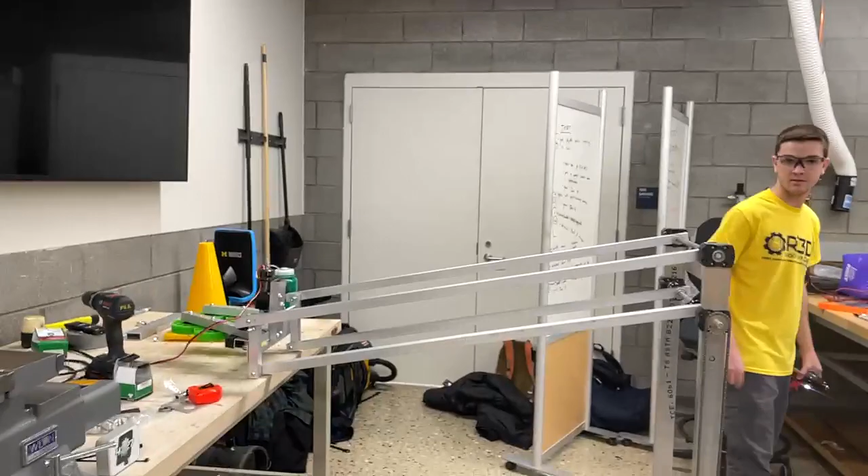Very exciting. Dom, do you want to talk? Talk to the stream, Dom. Sure, I'll talk a little bit. How do you feel, Dominic? I'm a little tired, but the coffee's getting me going. I was going to say, tired? That sounds like a coffee problem.

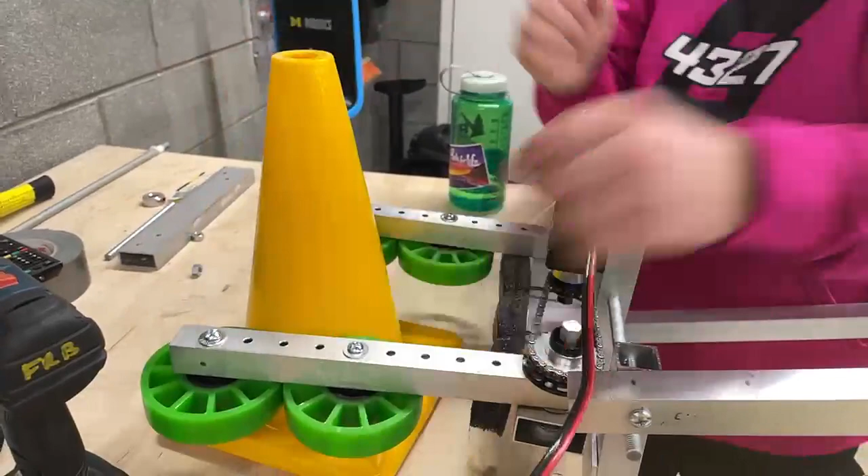Well, yeah, it is. Here, wait, let me come around the other side. A coffee vision problem, if you will. If you'll zoom in on our intake - so this is our intake system, run with this R775 Pro. We've got a 10-to-1 gear reduction on here just because that's what we had on hand. When you run this, it moves this one and pinches the cone, so it would look a little bit like a pinching angle. And then these wheels are free to rotate like this...

Well, actually, they're not. Oh, if you look... oh my bad, that was not attached yet. If you look under here, John, there's still zip ties that constrain the wheels, so they can move a little bit, but they're not free to rotate. Okay, so just a tiny bit of motion under there.

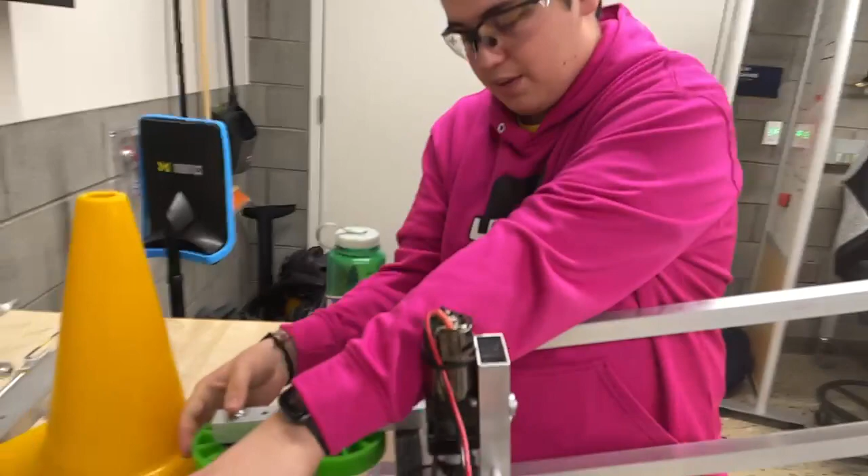We originally had them free to rotate, but the problem was when we tried to grab the cube, which is much wider than the cone, it would just shoot out. So we wanted to avoid that. We can do a strategy recap in a little bit - right now we're just going to talk about the robot, Colin.

Also, Emma says hello - that's my sister. Emma says hello, hello. All right, and then it's mounted to this big old 4-bar linkage, as I think we discussed probably yesterday, and the whole thing...

Oh, uh-oh, I'm moving, we are moving now. We lost the piece that wasn't attached - that's fine, we don't need that, it's useless. So the whole thing moves down.

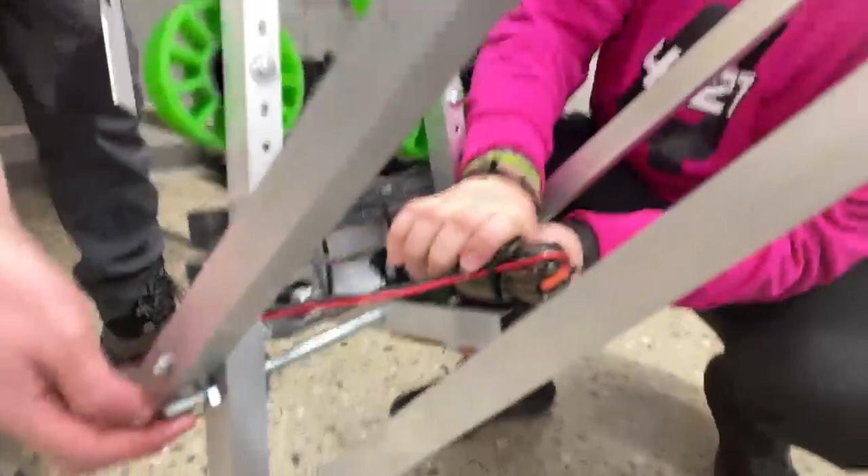Ideally - don't tell the stream that, you can't give them all the secrets on day 2 - ideally it would go all the way in, but currently we're running into an issue where the screw that we're pivoting about for this to fold up and let us be in frame perimeter is interfering with the bolt. So we're gonna cut that off and just have nuts on the inside. We have some other strategies if that doesn't fix our problem.

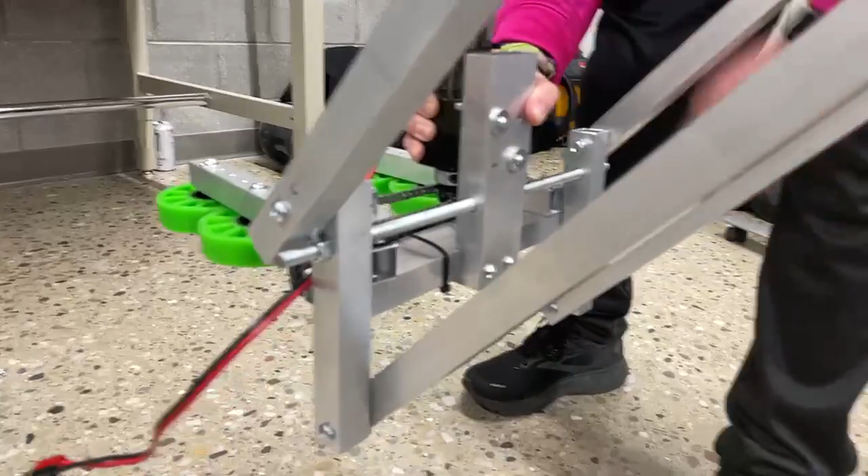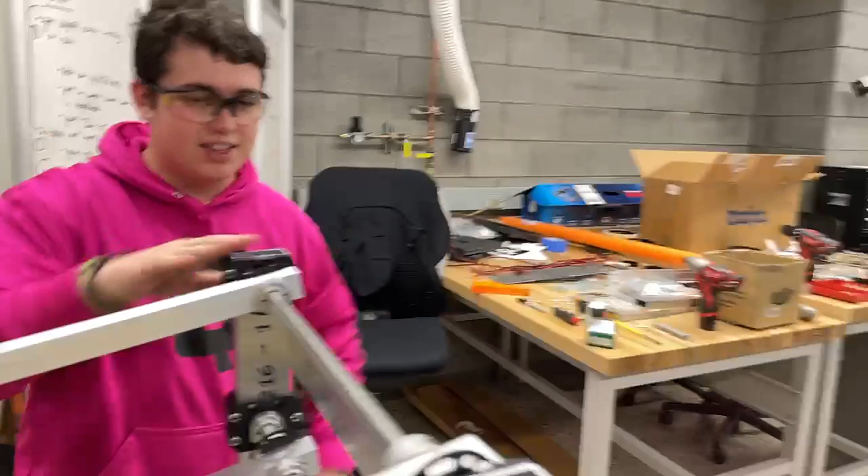Almost tall enough to ride the rides at a theme park. That's true, dangerously close - put some bottle caps in the shoes and you're ready to go. My parents did that. Really? Anyone else ever have to do that? Bottle caps underneath your heels, and you're just slightly tall enough to get into that roller coaster. Just wear new shoes with like thick heels - that works too.

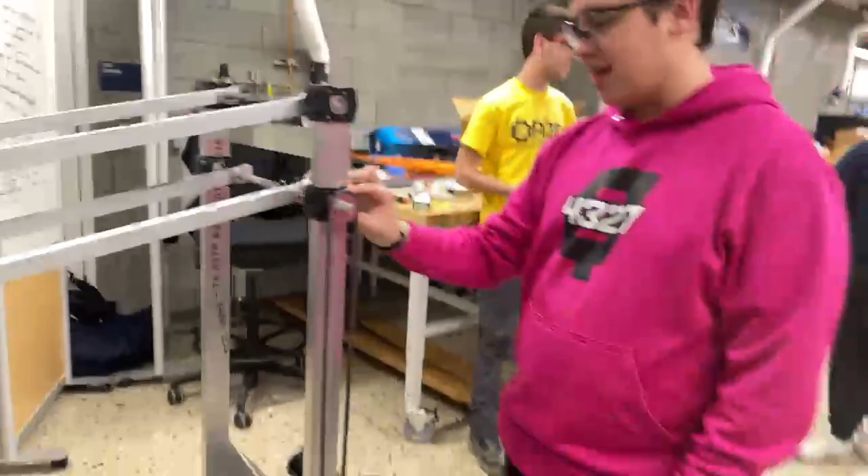That worked for me. So the linkage is all driven by this joint right here. We've got the sprocket running down to this sprocket, and then this goes on the motor.

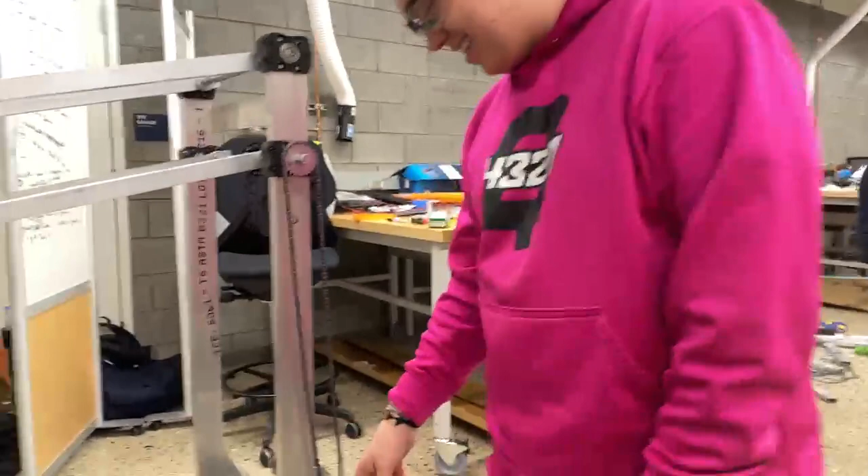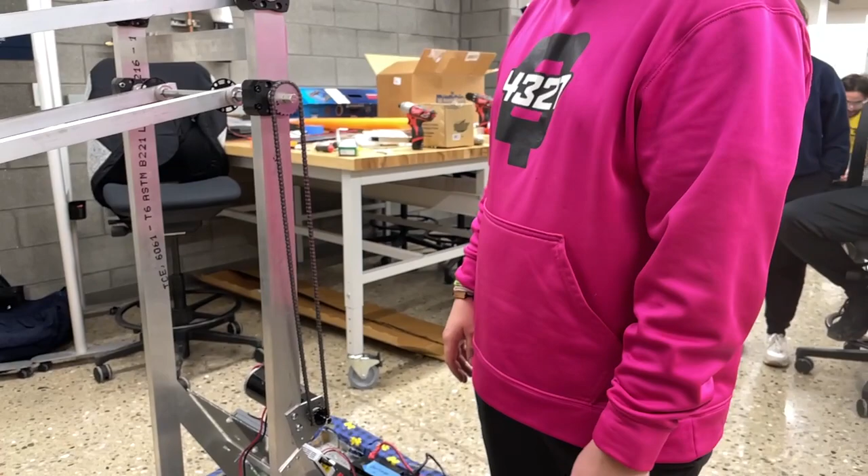This motor is a CIM with a 70-to-1 VersaPlanetary on it. That's the same gear ratio we used last year for the climber. Suspicious, almost like it was repurposed. And then this sprocket makes the entire system a 105-to-1 gear reduction. It's unclear if that's going to be super slow or if that's going to be not enough power or not enough torque. Once we've solved our issues down there, we're gonna test it and see what's up.

I want to let everyone know, unrelated, but there was a comment about someone doing toilet paper in their son's shoes, so I'm not the weird one. Someone else has done it too. It wasn't comfortable, but I wanted to ride that roller coaster. Toilet paper would have been more comfortable, but I didn't have toilet paper in the car. We had bottle caps from our water bottles. Go to the bathroom before you go on the ride.

Alright, moving on. Other developments that have happened today: the battery is now mounted.

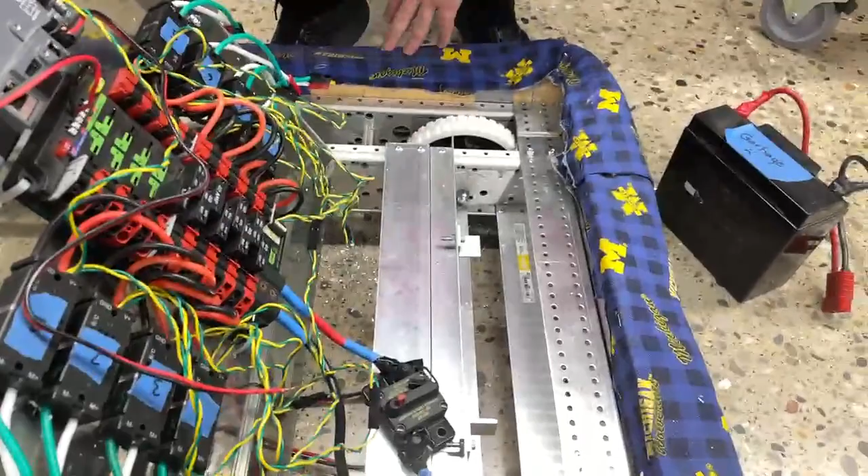We've got this piece of flat stock, this piece of angle stock. We didn't cut our chassis apart this year, unlike last year, which was only because it was already done on the chassis we were using. We decided not to replicate that so we could make use of those holes in future years if we need to. And then when you slide the battery in like that, it's not going anywhere.

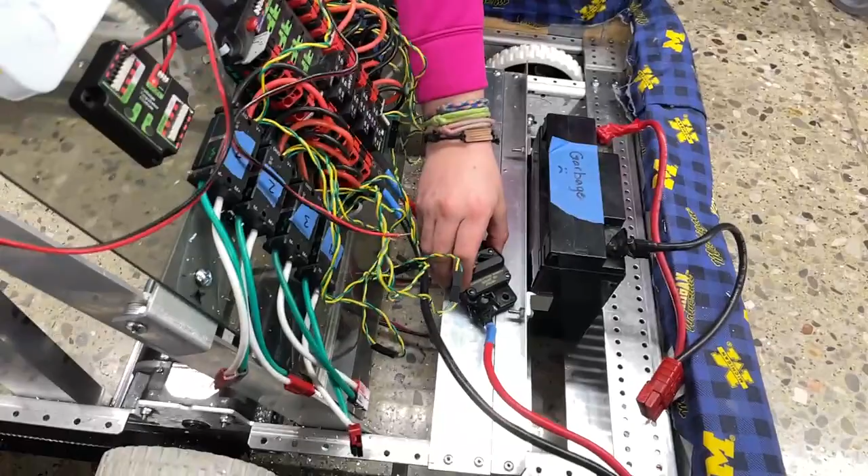We've got this piece of flat stock here where the breaker is going to mount. We haven't quite done that part yet. That's okay, and then that leads to the rest of our electrical system, which has been lovely mounted - this is the electrical board we were talking about earlier that nearly caused some issues.

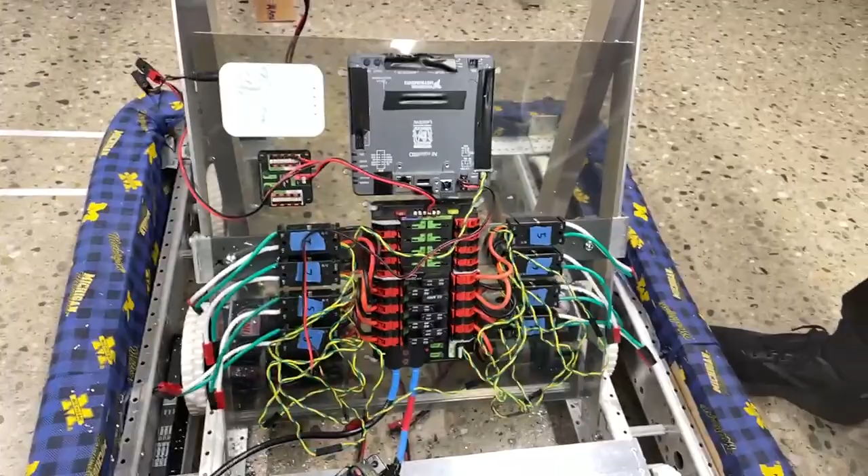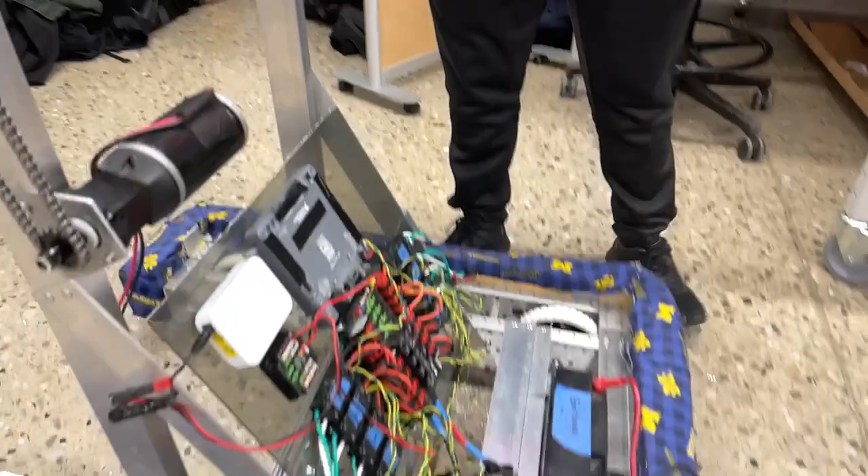Nearly caused issues? You didn't know about that? Not everyone was aware of that story. The incident - yeah, trying to laser cut it, that was an incident. Okay, so you are aware now. Good, very good. We didn't make cyanide - it's always good not to make cyanide.

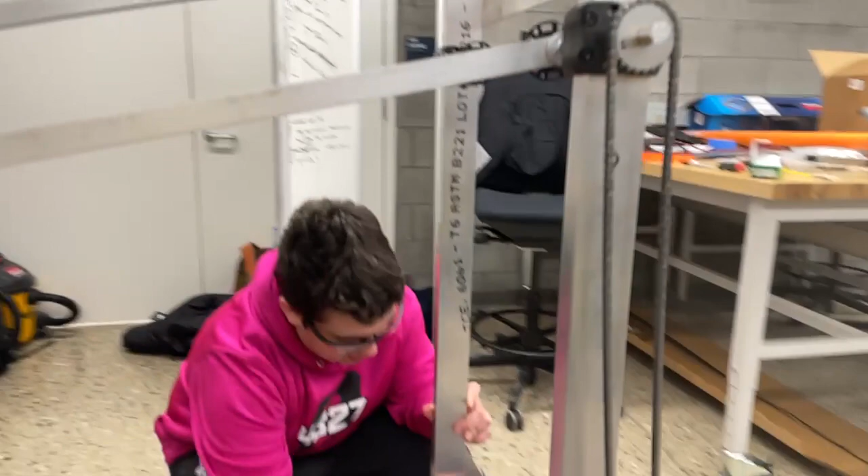Very exciting, hello Raina. So this is simply mounted by these like angled pieces that provide some more support for this. And then we just bent a piece of the same stock to bolt this to, and we're planning on adding some sort of angle iron here just to stabilize it a little bit.

Important question, it's John - two questions actually. First of all, where does the Gorilla Tape come in? Later, that'll probably be unforeseen, but it will appear, I'm sure. We'll have the Gorilla Tape. I'm sure that technology will be implemented.

More importantly, of course, where do the LEDs go? I happen to know we have them. We do have the LEDs.

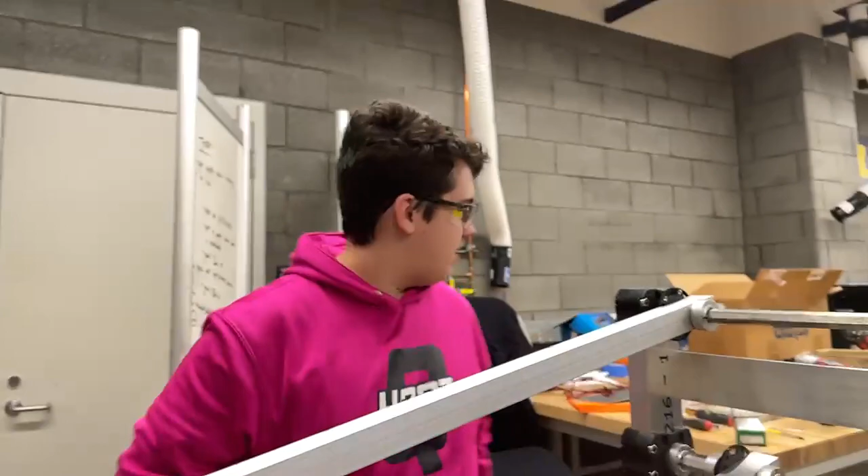Where are they going, Dom? No, those are the old ones that are plugged in - don't show them that one, those don't work anymore. They still work, they're lighting up, that means they work. That's more than zero, that's extra horsepower. Someone unplug that one. Someone give me the power supply for that one, we want to see the LED.

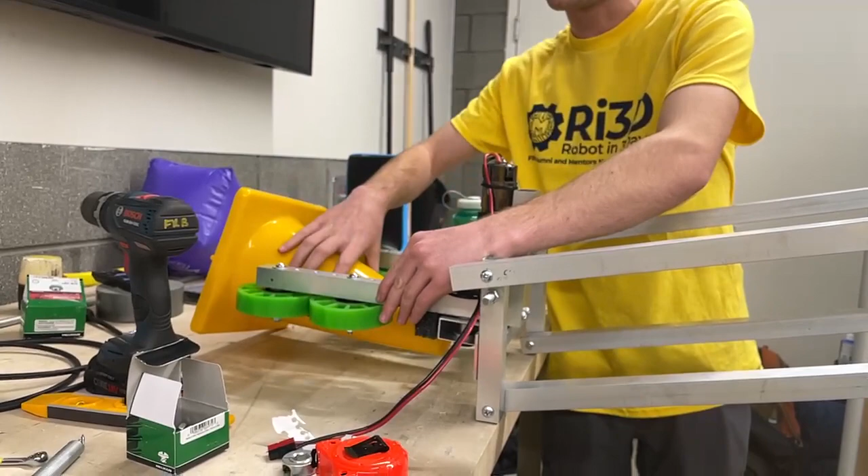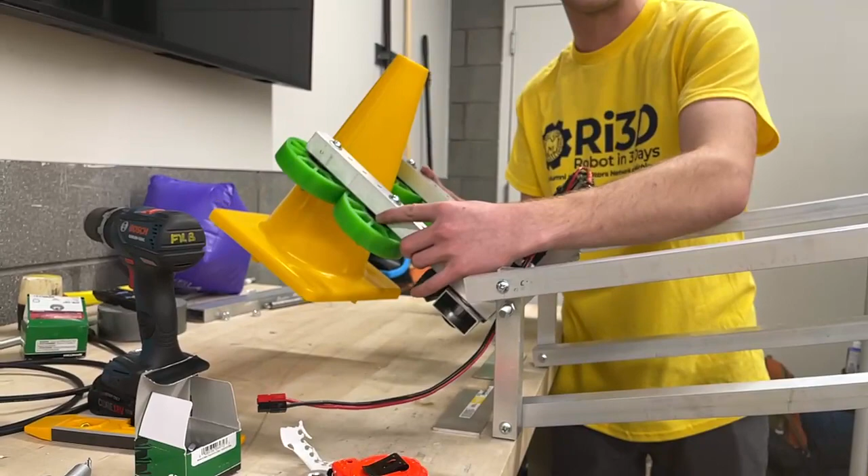Will the intake be able to pick up cones on their side? In theory, yes. We haven't gotten there in practice yet, let alone competition. It was designed so that part moves, and you can pinch and it'll hold on the far two wheels. We constrained the two wheels from moving too much so it won't shoot out. The nice thing we found out is that it's a feature, not a bug: when we lift up the wrist mechanism, the cone will rotate down so we can put it on the pegs. It won't work if it's backwards though. Yesterday we were looking at some kind of rotating mechanism to rotate them before we pick them up.

Where are we with that? Are we still on the same page, or have we gotten some new ideas? I'm not sure we've prototyped that yet. We were just thinking like a stick on a servo.

That's fairly advanced, a stick on a servo. Could that become passive now? It's become just a stick that falls. That sounds even better, we're going to remove complexity. Everyone loves that, nobody wants to deal with PWM servos.

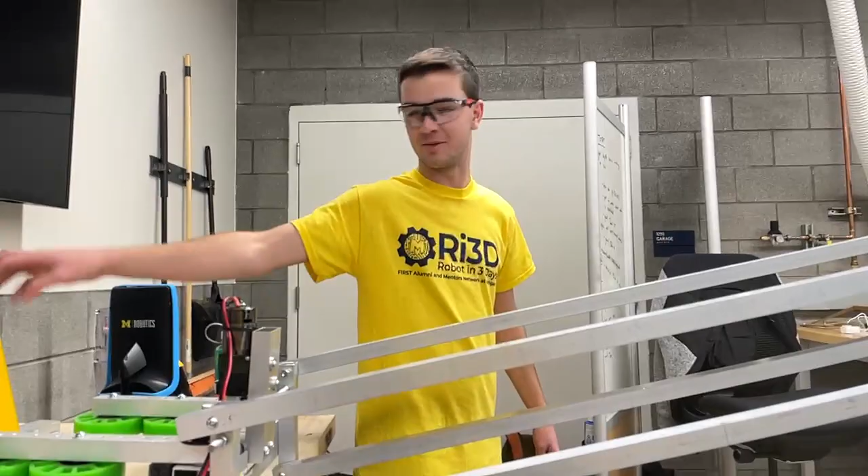Wonderful, wonderful. What haven't we covered yet? Have I missed anyone that really needs to talk to the stream right now? By the way Sophia, someone did say hello to you. I don't know who Thanos Priest is, but they said hi.

Oh, we did code things. Hi, Nathan. Okay, I don't think they... Hi, Nathan, very good, very good.

Okay, I have no voice right now. It's okay, it's okay.

What do we have going on with the drivetrain? This is a standard AndyMark kit of parts drivetrain. This is the long chassis, one of the longest chassis of AndyMark's entire existence, I think - don't fact check me on that. But this is the long chassis, standard AndyMark kit of parts, the same one you can buy and pick up at kickoff. I think we gave away probably 50 of them at kickoff. I don't remember the exact number. We had a lot of kit of parts this year.

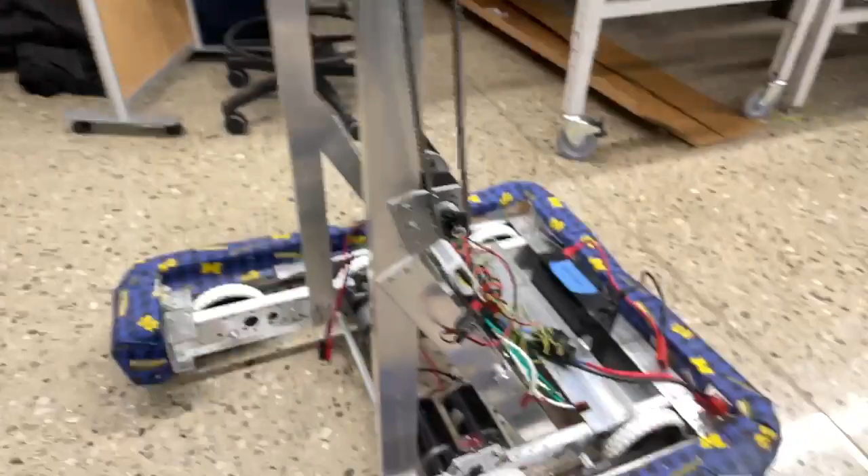We'll do a full recap. Oh my God, there are 30 people watching the stream right now. This is insane guys, it's a new high score. Wow, thank you so much everybody. We'll do a more in-depth recap on exactly what's happened at the end of the stream.

We have another person saying hi to Raina, by the way. Hi guys, I think the whole stream is just for you, Raina. I agree, pretty sure you're the only one they care about. Except, actually, Sophia had someone say hi too.

I did notice that Connor's dad didn't say hi to Connor this time, which, wow, that's rough. He was laughing out loud, remember? That happened because Connor almost set the building on fire. No, I didn't, it wasn't actually a fire. Yeah, but it was close. You were getting close. I mean, that's good, that's good. There was no sign, no fire. Stop hating on Connor, I 100% aided him with that. That's true.

All right, I think we're probably going to take ourselves back up to the room, and then we'll probably do a little bit of a recap. We'll talk about strategy. Who wants to go and talk about strategy with me?

Coding things? We talked a little bit about coding upstairs, let's talk some more. We started yesterday but we've continued a lot on it, and we've got a good idea of how it should work. Our drivetrain should be working - we haven't tested it on the robot, just in the simulator. The arm we haven't tested either, but that should be a little bit more complex. If you're looking for examples on how to use feed forward or PID, hopefully this should be an easy introduction to that. We're trying to get vision working. We have a camera that really isn't suited for vision because it's got autofocus and you need a fixed focal length for that, but we'll try our best to get it working.

Woohoo! Ask Raina if she got my Takis. Raina, did you get Takis? Yes, I already know who that is, and I did get Takis. You did get Takis? I did. Fantastic, we love that. All right, let's go team, keep up the good work everybody.

We had a comment that says Krishna is so cool.

Hold on, a little bit of a hold up. Piro's coming? Fantastic, the stream loves Piro. He wouldn't leave without me. That's fine, I wouldn't want to leave without Piro either.

Piro, you haven't seen the corner office we have upstairs. Have you not seen upstairs yet? That office is incredible, I almost died when I first saw it. No, we don't need the elevator, we have the fancy stairs.

We just had a question from Jackie's Giant about Sophia missing Jackie's Giant. I am unfortunately not in the room with Sophia anymore. If I remember to ask her, then I will.

I think we missed the question earlier about if we customize our drivetrain. We did, I answered a little bit about it. The drivetrain is just a standard kit of parts from AndyMark, the long chassis, with a little cutting. Pretty much just out of the box, long chassis configuration, 32 inches long, 28 inches wide. We cut the front off.

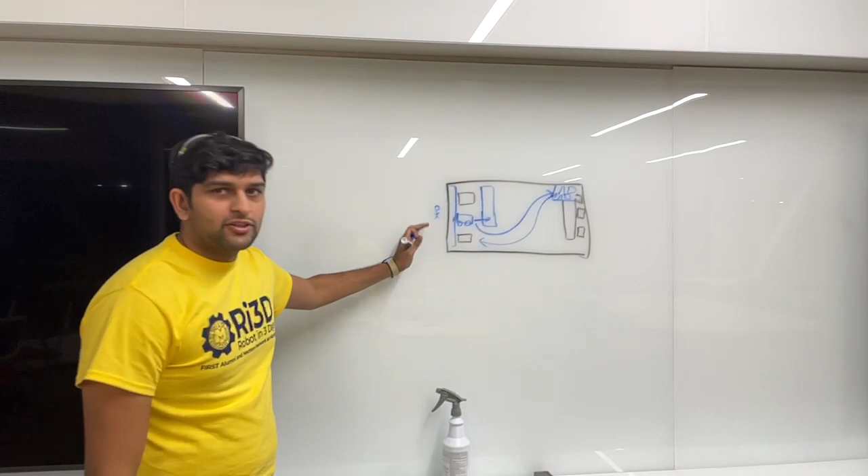And you know where that's going? Where's it going to go, Krishna? On the furthest peg, on the third tier, because our robot can reach that. Wow, with its four-arm technology. Over 3 foot past the robot arm.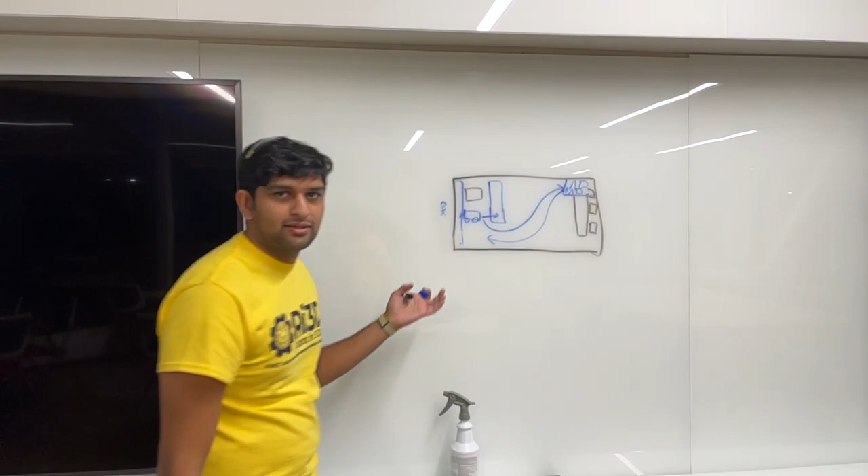Okay, that's insane, I'd like to point that out. How is that even possible? Well, we'll just remove this brick because it's getting in the way. Okay, so we push it out of the way in the game. It's like push the stuck cinder block over here, get that out of there.

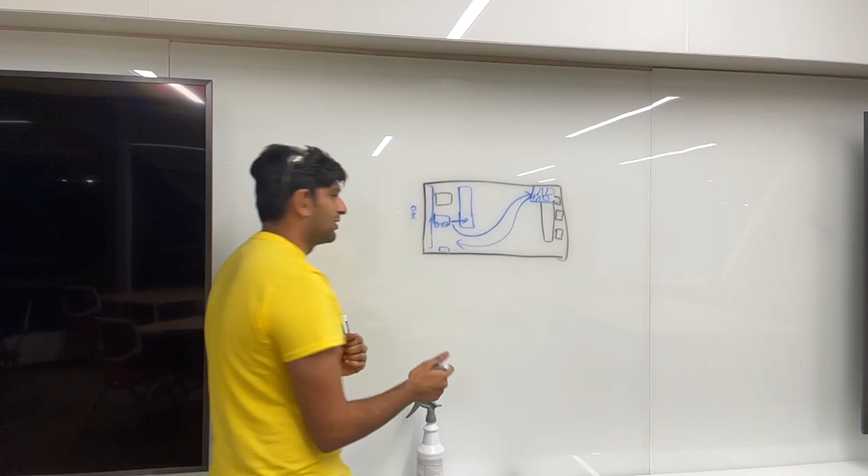It's stuck over here. So now, not only have we scored 11 points during Auton, we've now scored an additional cone on the furthest peg. Now do you know how many points that's worth? That's worth 5 points, Krishna. So what does that get us to? A total of 16 points.

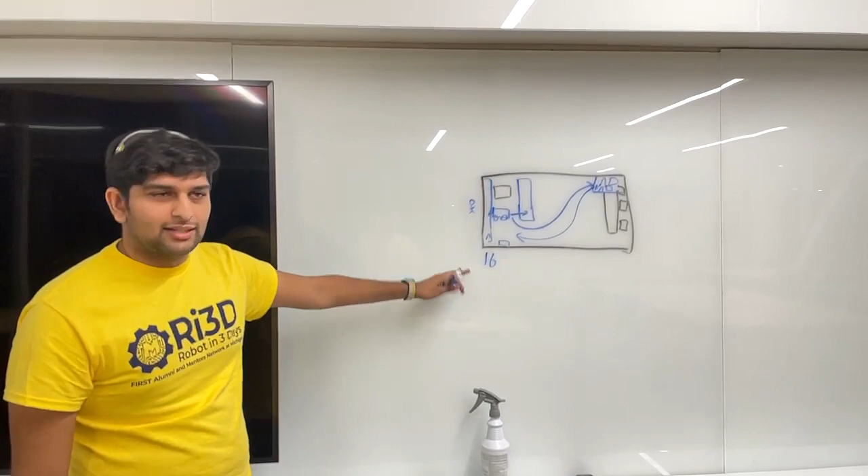Wowee, right? That's not all, because you can also bring a cube over and score it right next to that. So we're going to make two whole trips. What do we have, 2 minutes and 15 seconds? Now what are we at here? That puts you at a grand total of additional 26 points.

Exactly, so we add those, you got 26 points. Plus another 5 because there's a link.

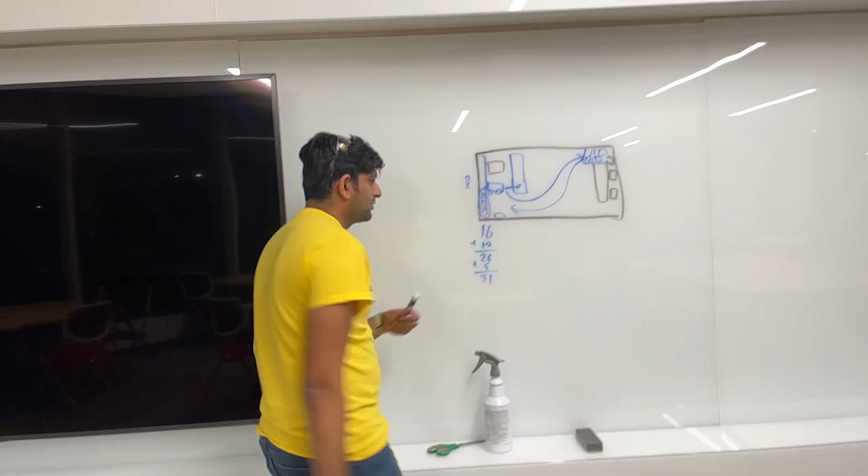We just had a comment from Piro, plus 5 for getting a link. Oh my goodness, how could we forget, look at this, the link points? 3 objects on the furthest peg plus 5, that's a lot of points. Now 20 points right there.

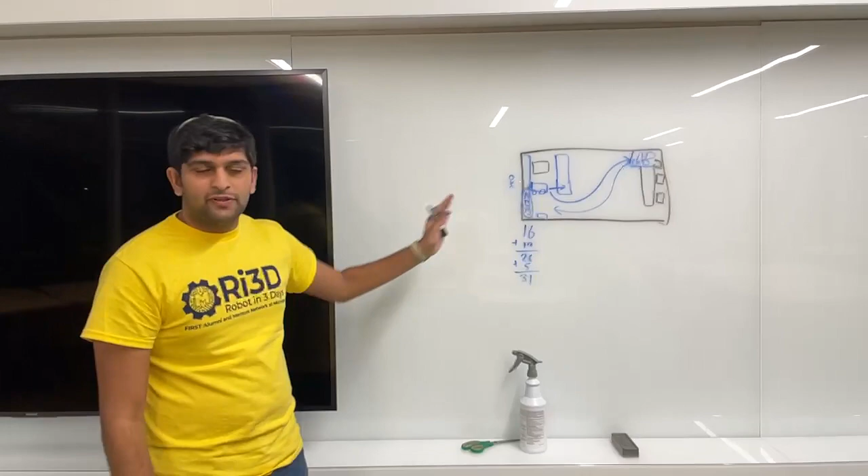Now this was just in the first 15 seconds of teleop. Oh wow, we're going to do this. We've got a 5-second cycle time. Plenty of time, okay? Krishna, you don't seem particularly convinced about that 5-second cycle time. I just can't help but notice - that's also including managing time to push the cinder block out of the way.

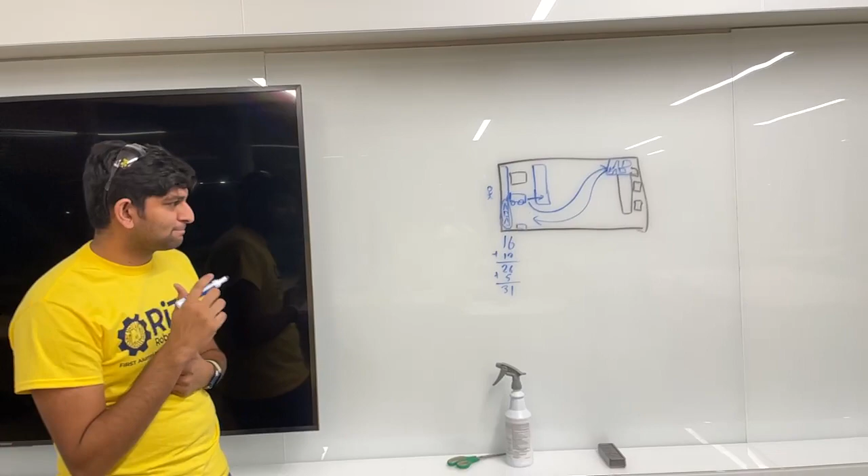It only decreases as you go on. Okay, so you get faster as you go, Krishna. Okay, we have one link.

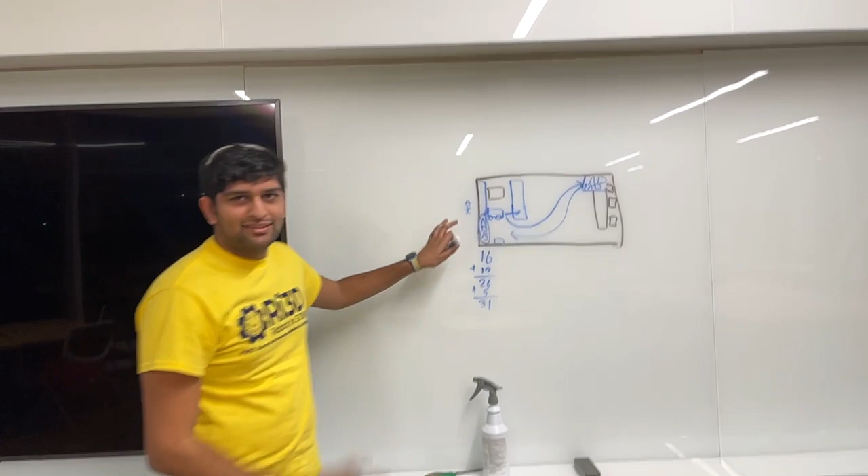As fun as this is, I feel like we might want to take a slightly more serious tone. Okay, so I feel like the idea that we don't have teammates is a good way to think about this.

At the beginning of the game though, at least for our competition, because we will only be competing against RI3D robots, which historically speaking don't tend to perform particularly well. This is true, but it's important to know - sometimes we're the cinder block, it happens, you know.

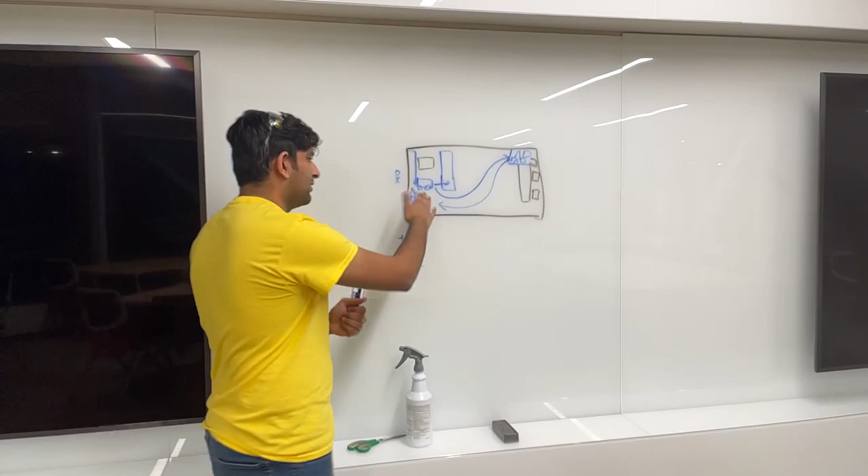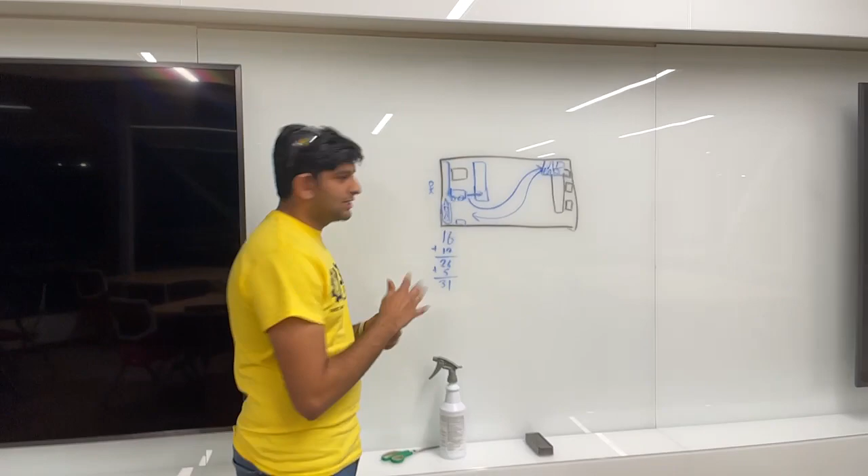It's important to know what your robot can do, right? Like if you build a robot that can only move cones, then you got to realize that you're only going to be able to score 3 links, on the bottom level. So there's these limitations you gotta pay attention to, and you can't get the cooperation bonus if... well, I guess you three could all get in the bottom.

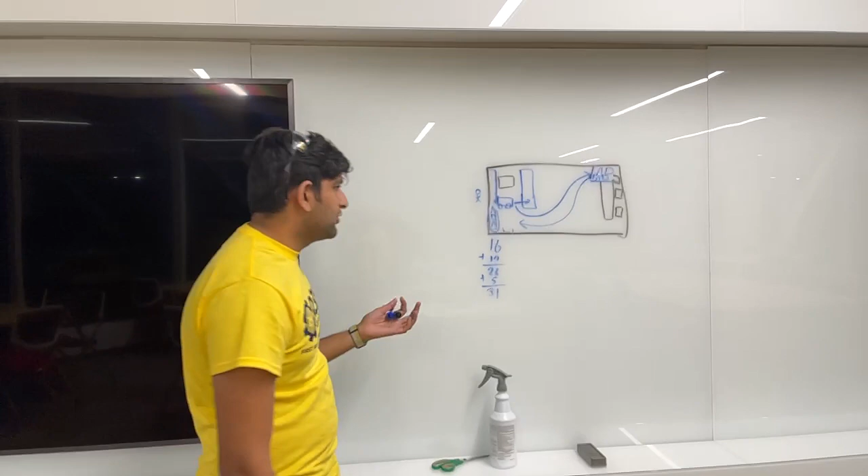Cooperation, a little bit difficult. But now let's say your teammates happen to be really good at scoring cones - what should you focus on? Should you focus on bringing cones from the opposing side over to you, or should you focus on bringing cubes, or bubes, and scoring them?

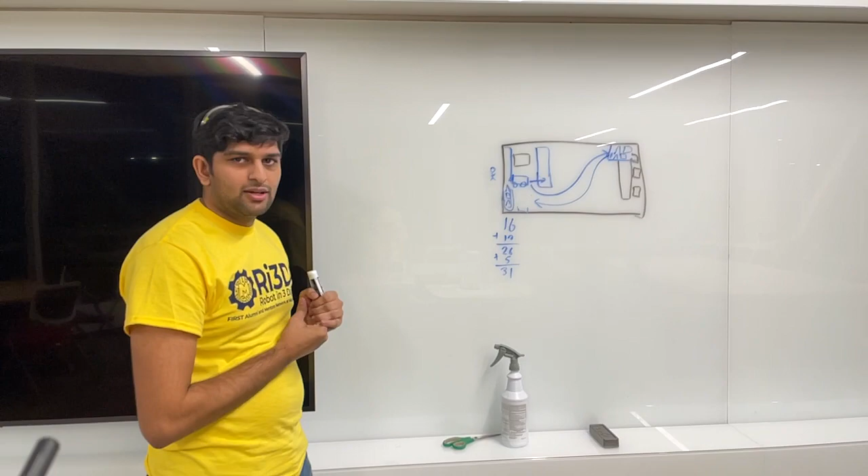So I think our focus was we want to be able to do both. We want to have a pretty fast cycle time, which is why we chose a speed-oriented approach. We put extra work into the code for drivers, making sure they can switch between whichever drive - arcade or tank - whichever they're more comfortable with.

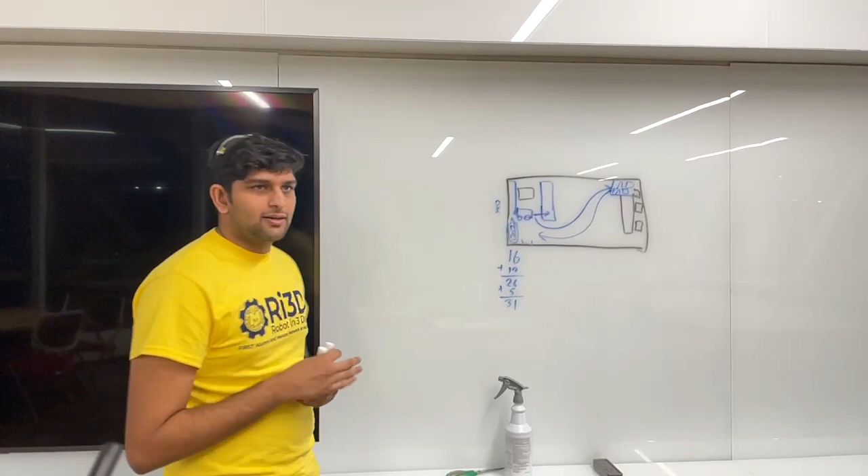Different speeds - we've got many different things in the code, which you can check out on our GitHub. But mainly, we want to be able to have a fast cycle time while also scoring both cubes and cones.

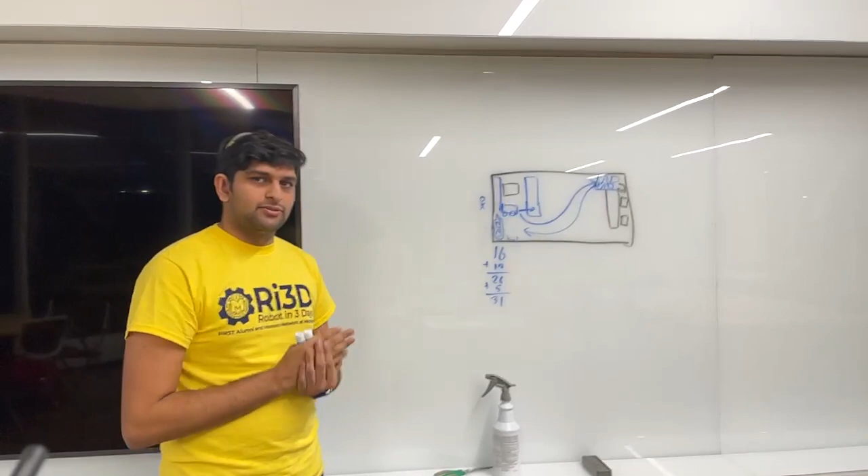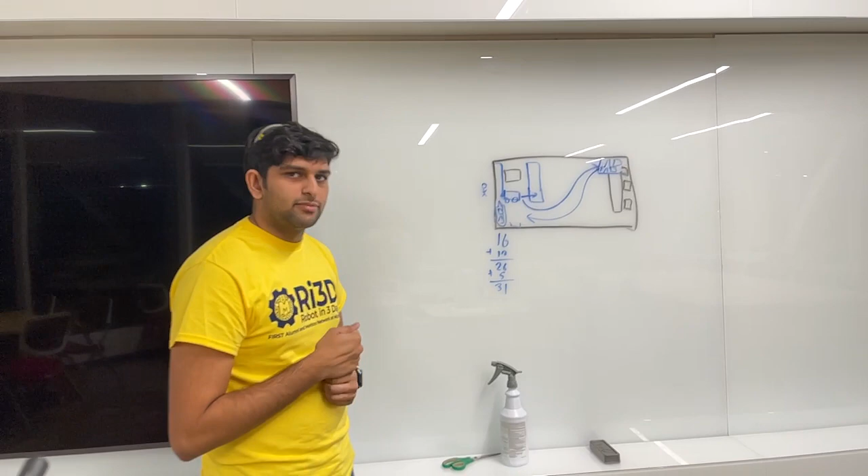Our goal is 16 points during auto, pretty doable. We want at least 3 game pieces during teleop, preferably on the furthest location. We did build the robot specifically to reach back there, and you get way more points for being back there - it's 67% more than the middle row. That's a lot of percent, you know?

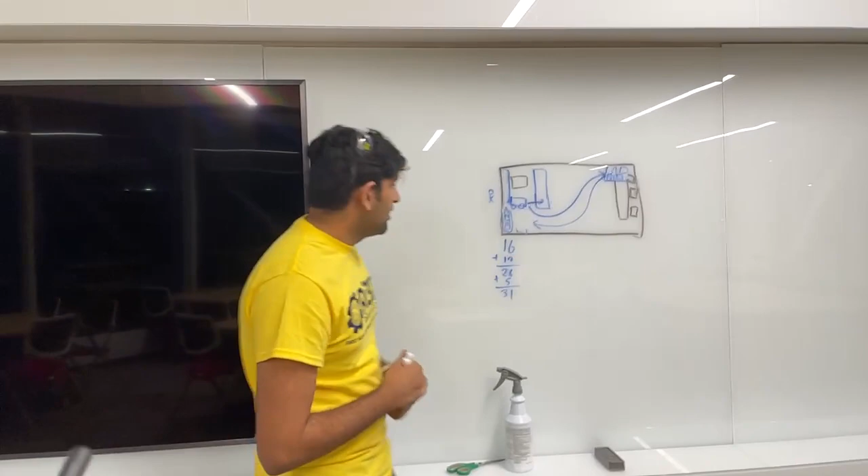And you can score in the center to get that cooperation bonus - might as well get a few ranking points there. And with teammates, you're only going to increase the score, because if you can already do this much, there's no stopping us.

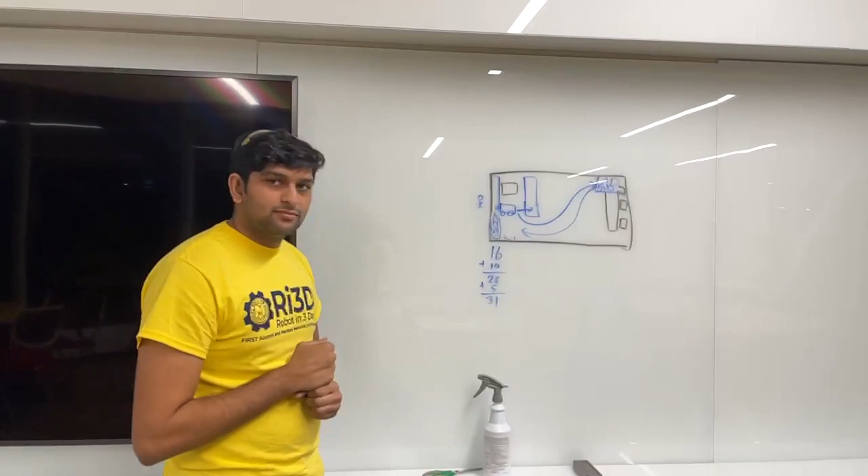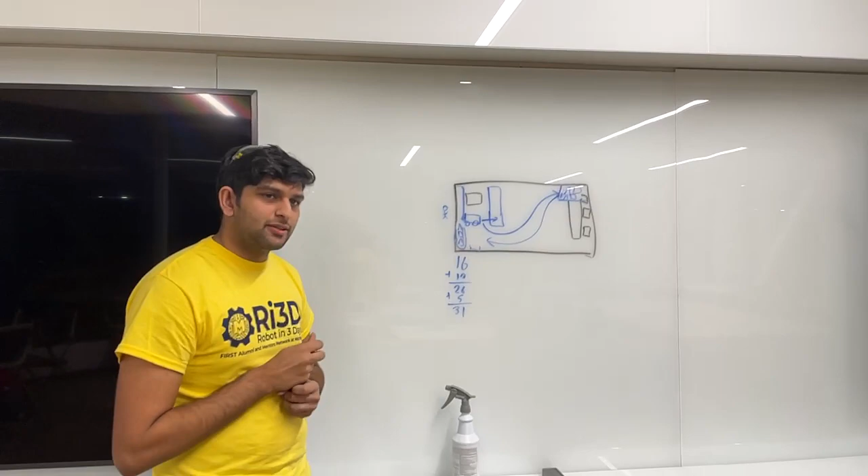We also wanted to talk about our thought process on balancing the charging station. How are we thinking about balancing on there? I think that's more of a mechanical question - if you want to ask Piro. Piro, let's talk about the charging station.

Come on up, Piro. Let's get you in front of the whiteboard. Let's see it - there he is. There's our guy. That's him.

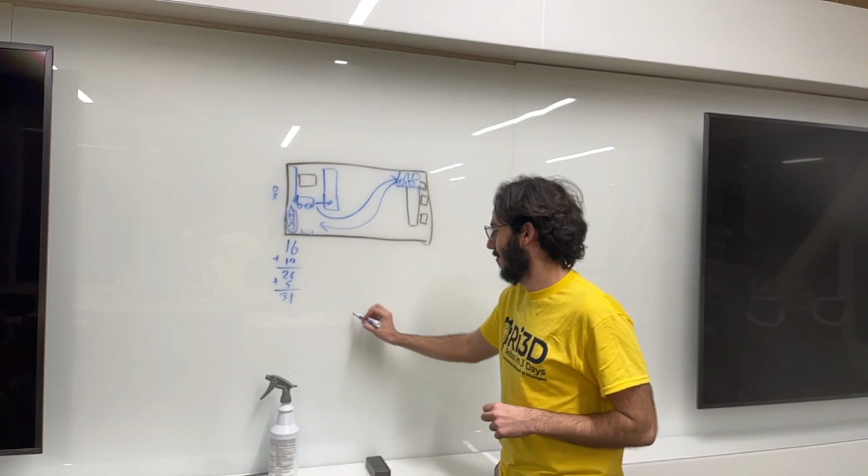The charging station, for those of you who don't know, has a little platform with 2 little ramps and a section in the center. This center section balances on a box that exists underneath there, so when you put weight on one side, the whole thing ends up tilting up on that box, creating a pretty steep angle.

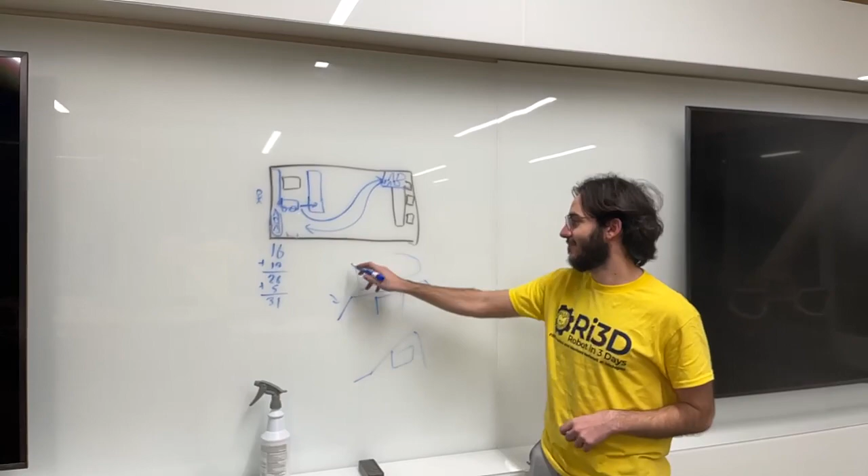You want to have it balanced, so you get more points for having it balanced. Ideally, we need it to be balanced with the robot on top of it. So you've got to get the robot up there, and then get it in the center so it's nice and flat - or at least not necessarily center, but with the center of gravity in the center of the thing.

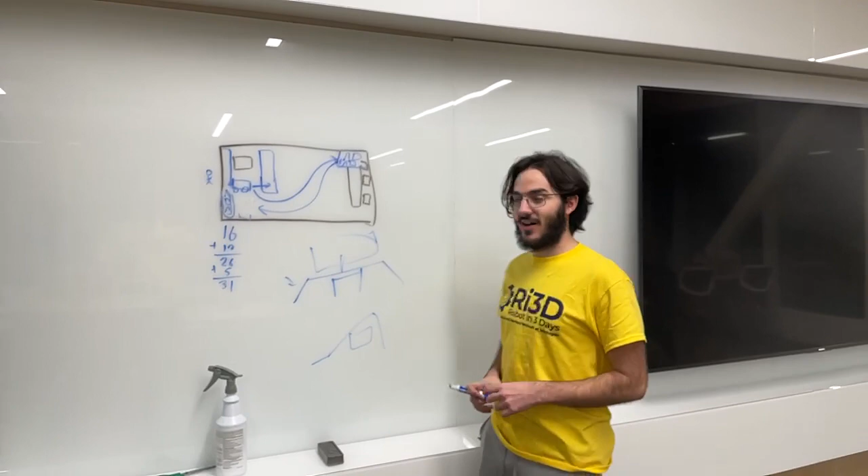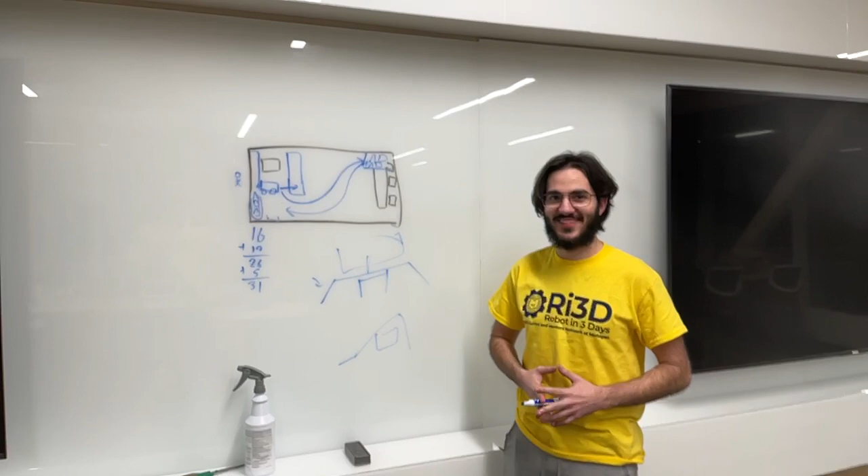For us, because we're building this robot in 3 days, we'll be driving and using our drivetrain to balance. So in teleop, in the end game, we're just going to adjust manually - seeing like, oh, we're tipping backwards, we should drive forwards. Great answer. And how are we doing that during autonomous mode then?

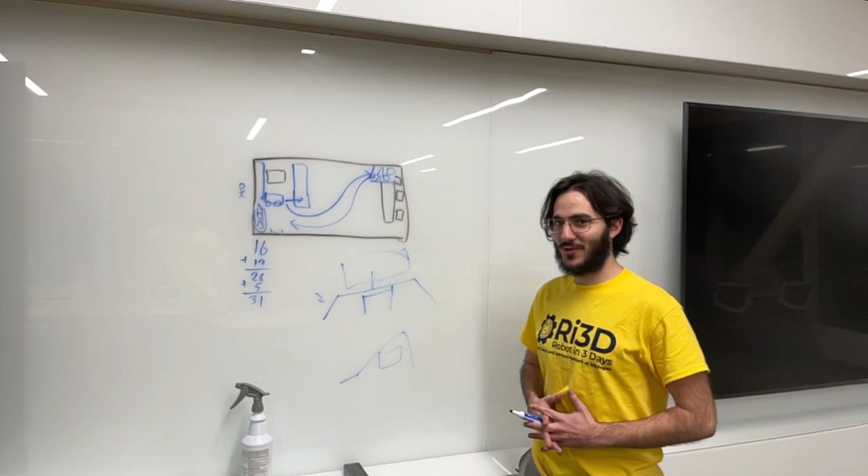We won't be doing it in autonomous mode, most likely not, unless we can get lucky. We did speak yesterday about a certain computer vision problem - Krishna spoke on it at length. Do you want to talk about that again, Krishna?

We're planning to use the April tags kind of to show off how it works. By doing that, our camera is going to get used up looking at the field rather than a level. So the computer vision solution to the problem, you'd say?

There's only one solution - there's no other way a team could fix this problem with computer vision? I'll tell you the solution. Many teams know there's a NavX - there was a comment about NavX for auton balance in the chat. We don't have a NavX. The problem is NavXs are a little expensive, and we want to make something accessible for newer or under-resourced teams. If you just use everything that's incredibly expensive, like Swerve Drive, NavXs, it'd be a little bit difficult.

A NavX is really useful - if you have one, it's amazing. It can get you a lot of stuff. Nothing wrong with having one. It's actually perfect for autonomous mode balancing - you can tell exactly what angle you are, and when you reach a flat angle on top of this ramp, just stop and you're set.

But the computer vision solution, we're going to go away from - I don't think it's viable on our robot. The plan is you have some sort of camera, and it's looking this way.

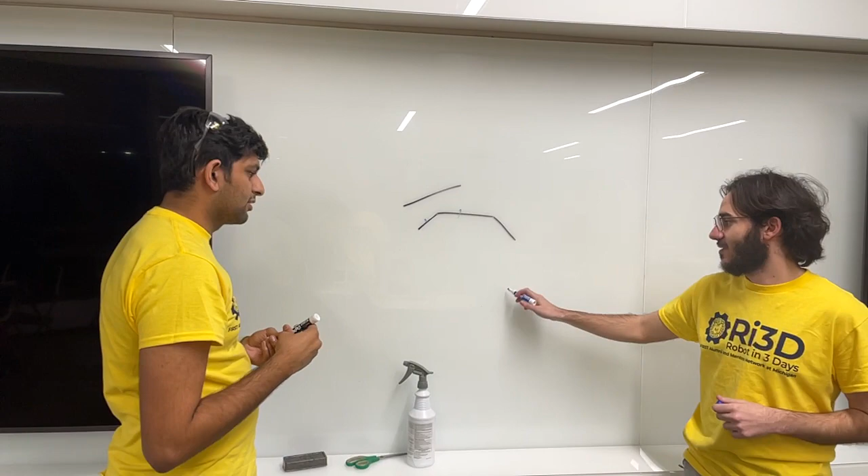Because when you enter it, this ends up being a different angle than you'd expect - the piece will be somewhere here, and the actual ramp is farther up, so it gets a bit weird. It's 11 and 15 degrees, if I remember correctly - make sure you check the manual to confirm.

What you see is you can go at a faster speed when your robot's at 11 degrees, which you read off your NavX. Then you hit the 15 degree ramp - maybe you want to go a little slower so you don't overshoot. Or if you speed up even more, you could do a cool jump, maybe even a flip.

That could result in some penalties and a non-functional robot. But you'd be the people's choice winner. That would be the case. And isn't that what we all want? I mean, people's choice is the first choice, you know.

But you get to this higher angle, 15 degrees, you can slow down a little bit more, and then finally when it levels out, you'll be at 0 degrees, and that's when you stop.

I was wondering if you'd address a concern - our robot is kind of like a C shape, and our intake happens to be really close to the ground. So how do you plan on making sure we can climb the ramp going forward? We lift the intake. So probably going onto the ramp, if you remember what it looks like in the other room, we have robot wheels, and then the 4-bar will be here.

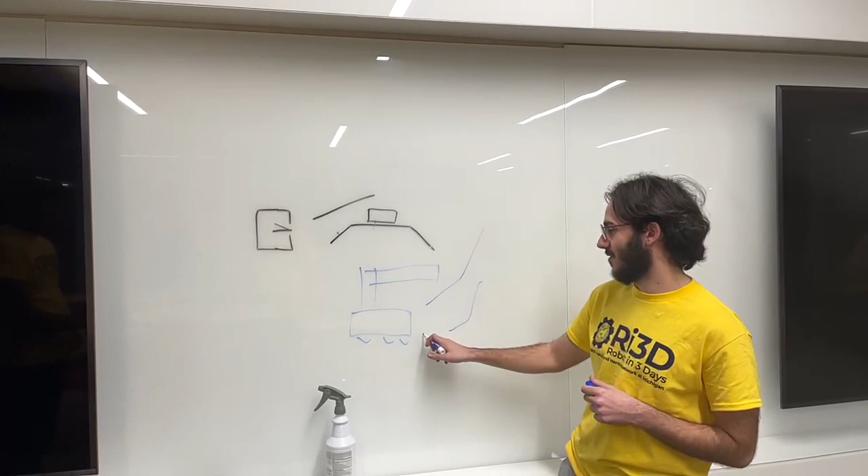Going onto the ramp, to avoid hitting the front of it, we can just have it in an upright position. Honestly, for most travel, this upright position is probably safer for most of our stuff, just because when it's at the lowest position, it's extremely close to the ground. And that was just because of packaging constraints.

Wonderful. I think that mostly covers general strategy for the game. A quick recap: we want to be able to pick up both types of game pieces. We have a plan to be able to right cones that are knocked over on the ground, although that hasn't been implemented or finalized, so we can't really speak on that extensively. We don't have any plan to level the charging pad during autonomous mode, although we will hope to score one game piece on the ground level, and then of course drive onto the charging pad during auton. And then as for endgame with the charging pad, we're just going to do it manually. I think that's about everything.

Did we miss anything? Unless you want more specifics about the grabber or anything mechanically with the grabber or the lift. Would you like to talk more specific about the grabber or the lift? Because we've got time, if you want me to. Please, why don't we talk about the grabber and the lift? You want to do a little diagram? Sure, oh my goodness, we love diagrams.

I don't know a whole lot about the lift, but I do know a lot about the grabber. I did do the CAD for the grabber.

Oh my goodness, CAD for the grabber? Yes. Is that CAD going to be available somewhere? It is. Is that place determined yet? We might not have actually determined. Okay, to be determined. CAD for the grabber will exist, it will eventually be there, somewhere. It'll probably be under a FIM account on some website. More than likely, we'll get back to you on that.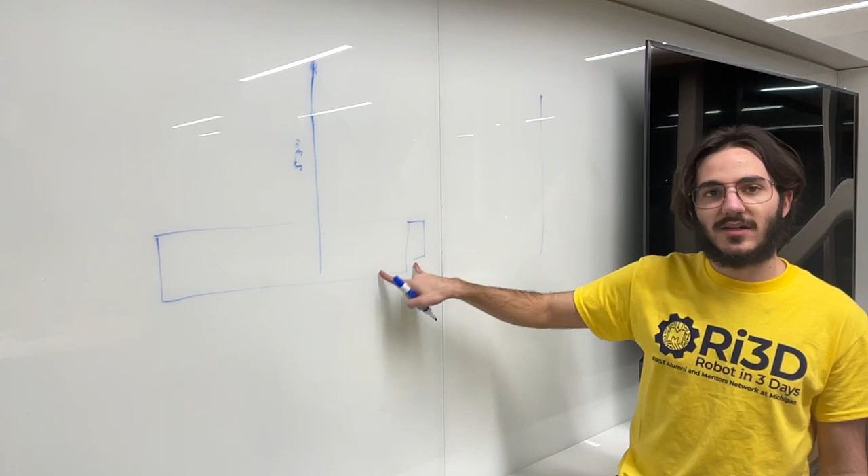So I set this equal to 53 inches, gave us an inch of leeway because of manufacturing tolerances. At the top here, you have your little pivot point, and then I created an arm that went from here to, was 8 inches originally from the inside of the frame, because we were planning on having the entire intake stay in there, or the grabber arm, but now it's going to be folded up, so it actually goes to a point that's 4 inches from the edge of the frame, so from here to about here, with an inch above the ground.

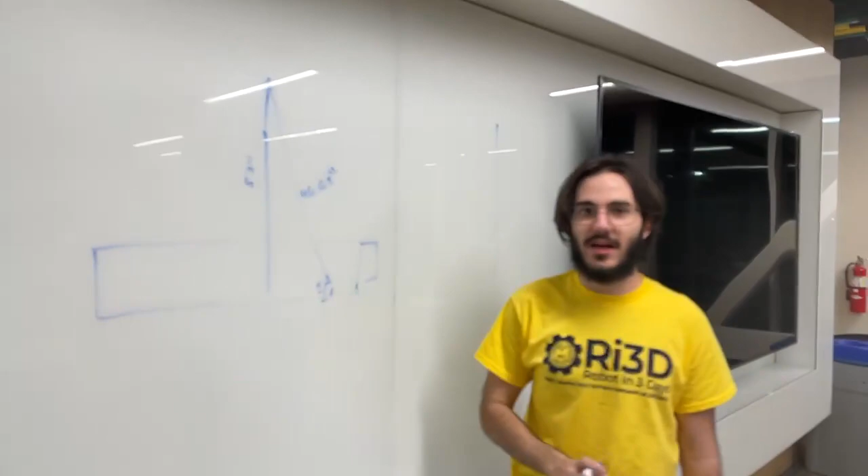Do you know that distance off the top of your head? Which one, the length of the arm? Yeah, so in the CAD at least it's 46.69 inches. In real life, it is a little bit different, I don't remember if it's a little bit larger or a little bit smaller. I think it's a little bit larger just because in the CAD this is measuring center to center distance, but in real life you obviously need material around your holes. So it's about 47 inches then, probably.

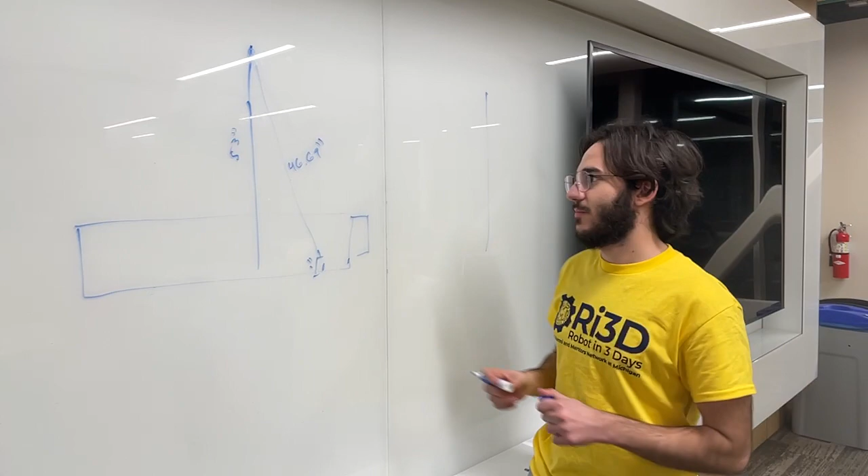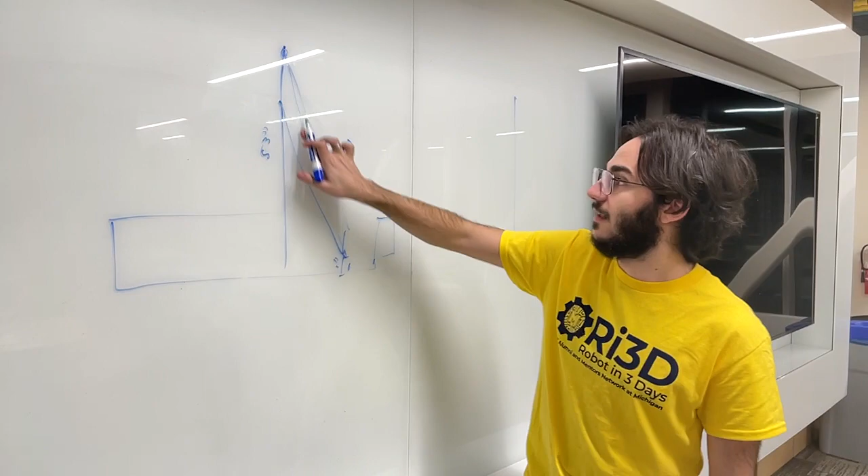Give or take, that's for this top bar, or this is, I guess, from the bottom bar goes to here, and then the top bar goes to a point that's 6 inches above that. So we have 6 inches vertically between these 2 bars in the 4-bar system. Yep, and this is accurate to real life.

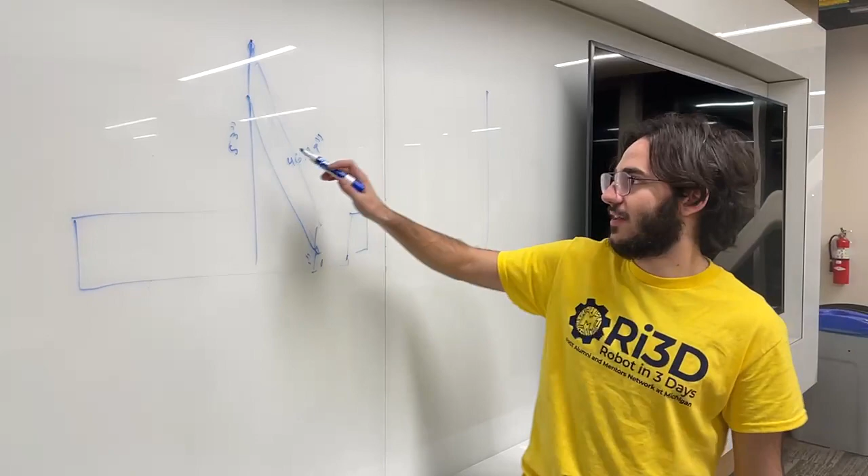So I created this sketch and constrained it. Then I made these all construction lines, and created another set of arms that you could move up and down.

Do you want a different marker? That one looks like it's just dying, the way I'm holding it.

I made these distances equal to these construction lines over here. Can you fix that bottom bar at the top? It bothers me just a tiny bit. This guy right here, you just can't really see it on the screen.

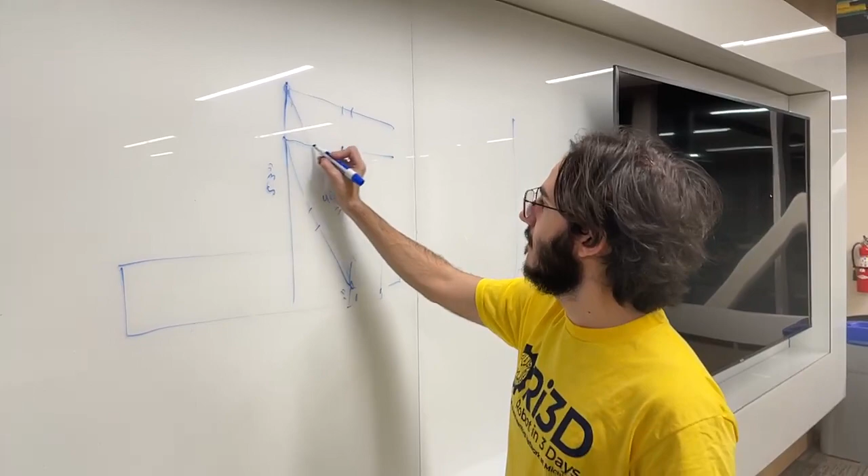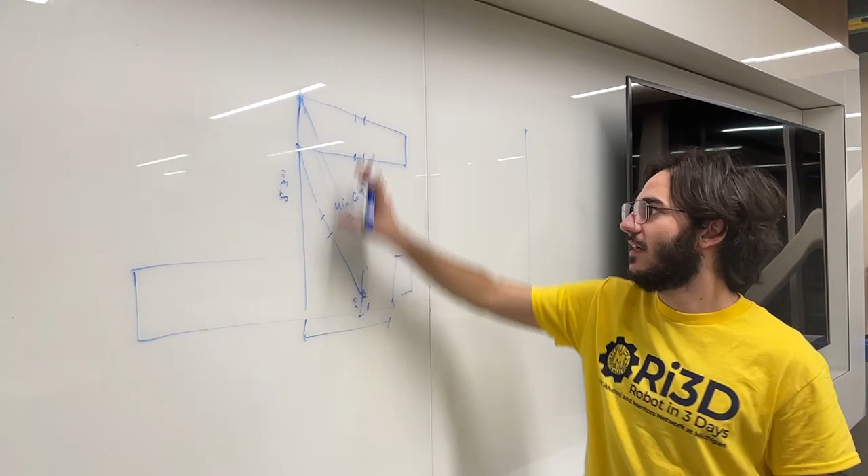Okay, so now we have these two actual lines that you can move up and down, with this geometry staying in place, and then we mess around with this distance. So I could increase this distance manually and it would automatically update whatever the length of these arms were, to test if we could make it to this length.

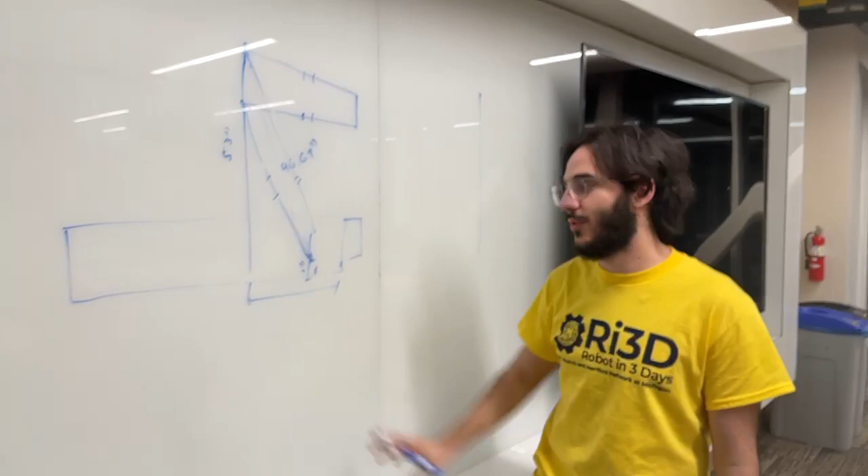So if other teams are doing similar ideas, you can use this sketch as a starting point and mess around with some of the parameters to get a feel of how long this is going to stretch out. You can kind of drag it around and stuff.

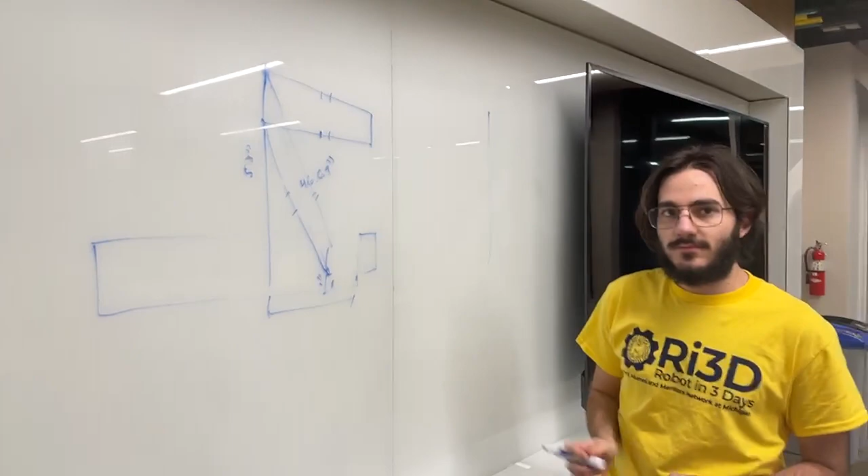So in reality, what we're looking at is how far back from the front of our robot we can set our uprights to mount the 4-bar, while still being able to reach exactly that third level.

And there's a couple parameters you can actually change. Not only how far back, but you can also change how much space you leave for your intake, and how high up from the ground the minimum position is.

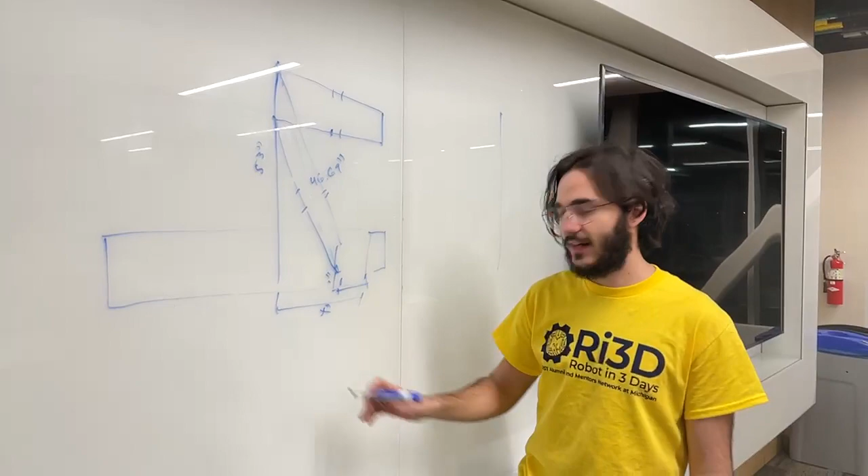Because to get this minimum position of 1 inch, we actually had to offset the arms. So if you're looking at it from the front, the arms for the 4-bar are actually off by 2 inches, so they fold into each other.

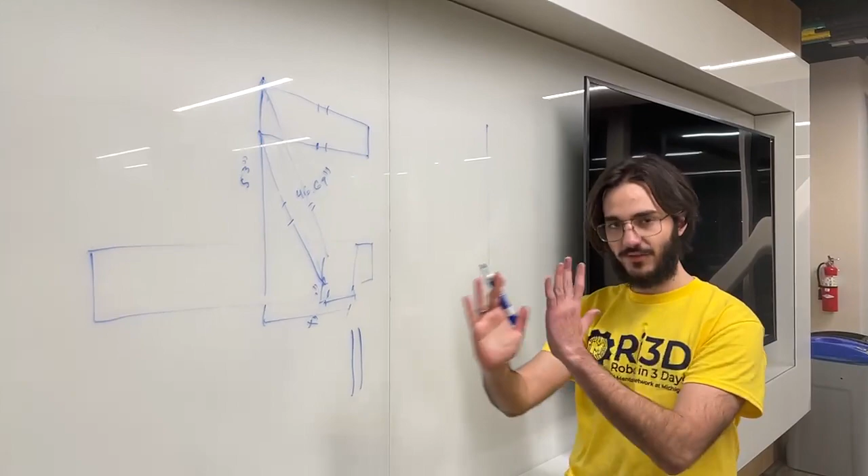So we have one set of arms mounted on the outside of the upright and one set mounted on the inside. That way they don't interfere with each other. And that's how we got that squish.

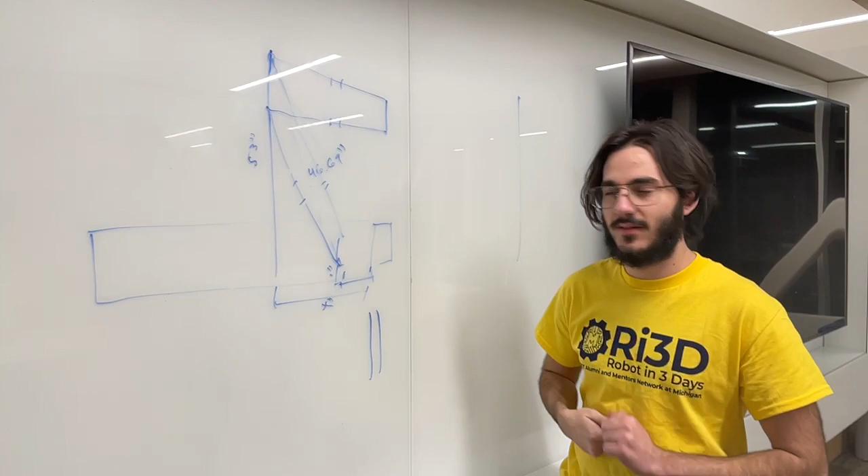Perfect, wonderful. Great, yeah, all right, I think that's about everything. Did we miss anything, guys?

A little note from what we were talking about earlier. We realized that for the balancing during Auton, you can actually use your camera to look at the April tags to see your pose related to it. We haven't figured out the details, but that could perhaps be used to make sure when you're looking at it straight on, you are balanced.

But if you drive backward onto the charging station, you'd have to be driving backwards or have a backwards facing camera, but you could use the April tags to determine the exact orientation of your robot, and therefore how you could balance when you're looking at it at a specific angle, you know you're balanced.

So really it's another computer vision solution. It is a vision solution in the end, but aren't they all at the end of the day? Isn't it all really just one big computer vision problem? You know what I mean?

We'll keep you updated on this strategy, but who knows. I think that's about all we need to talk about. Maybe we'll do a quick recap of everything and answer some questions if any are had.

And that might be the rest, that might be the whole stream. What time is it right now, guys? 8:30, we've been streaming for 1 hour. Oh my goodness, there you go. Time really does fly when we're having fun, isn't that right?

If you guys want, I can recap. We can all have a seat, you know, have a little seat, got the boardroom table, you know, feel official. I'm not okay, you're not okay. I don't want to be too far away so that they can still hear me.